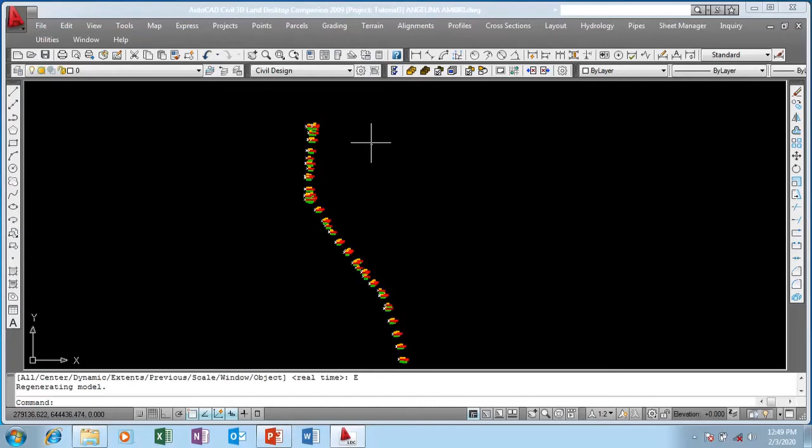On your keyboard just type Z, which stands for zoom, press enter, and E, which stands for extents, press enter. These are the points that have been imported. They look very scattered and you can't even understand them, so not to worry.

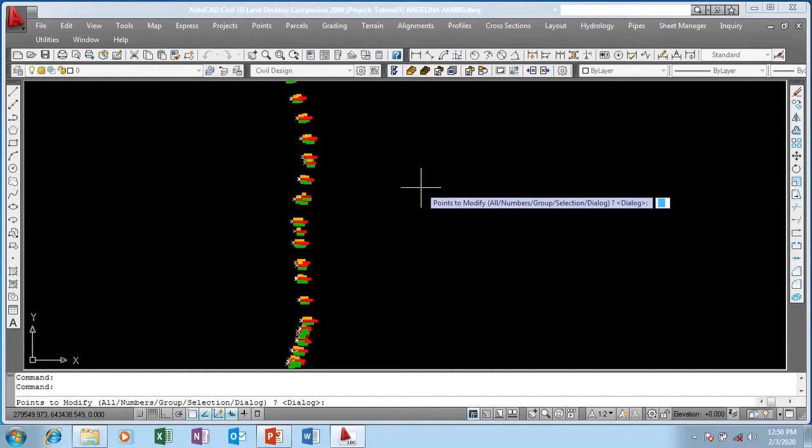We'll go over to Points, Edit Points, Display Properties. I'm going to say All. Press enter. So it's loading, and when you press enter, it comes up. I'm going to go over to Text. I'm going to change the text height to 0.4.

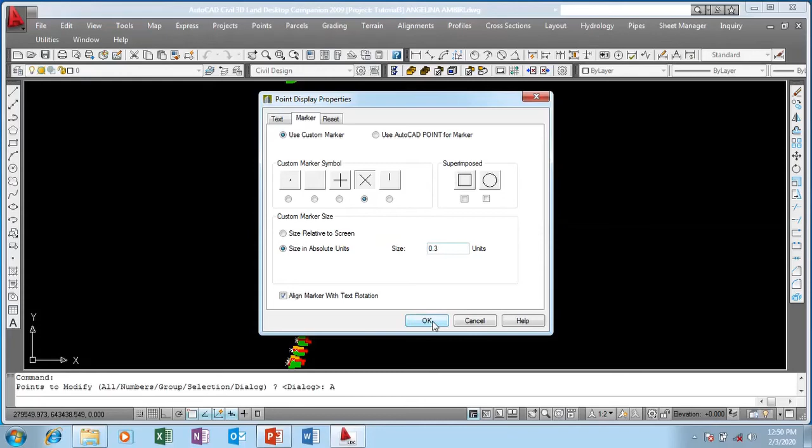I'm going to go over to Marker. I'm going to change it to 0.3. I'm going to click OK. Now it's edited. Now it still looks a little bit big, so you can still go over to Points, Edit Points. I will type A for All.

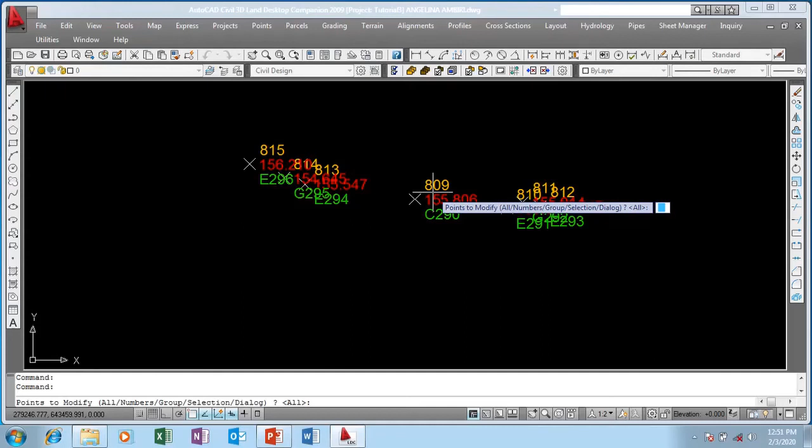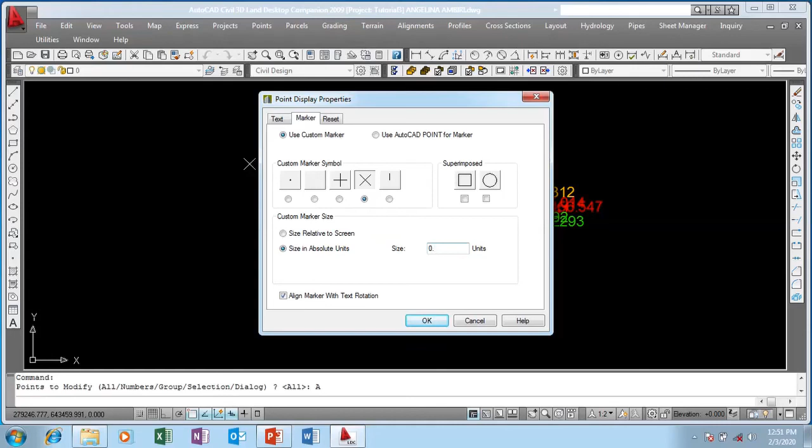I'll click that. When it pops up, I'm going to change this to 0.3, or 0.25. Then I'm going to go for the marker. I'm going to change it to 0.15. I'm going to say OK, and it's done, and it looks a little bit better now.

So this is the marker, this is a point. Now this is the number, this is my elevation, and this is my description. That's it, guys.